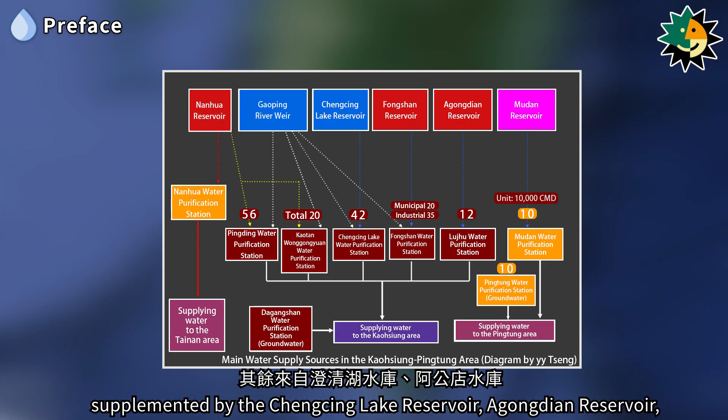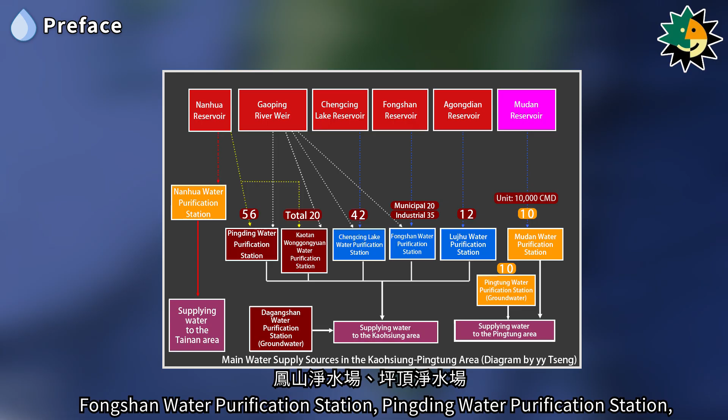The main water source for the Kaohsiung area comes from the Gaoping River weir, supplemented by the Chengcing Lake Reservoir, Agongdian Reservoir, Fongshan Reservoir, and Nanhua Reservoir in Tainan. These sources provide water to the Chengcing Lake Water Purification Station, Lujhu Water Purification Station, Fongshan Water Purification Station, Pingding Water Purification Station, Wonggongyuan Water Purification Station, and Kaotan Water Purification Station.

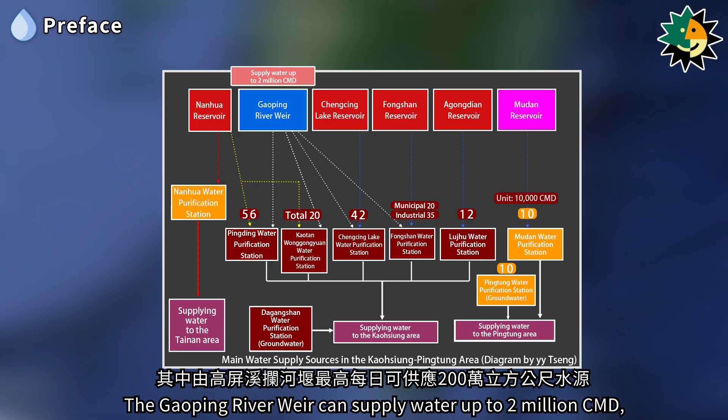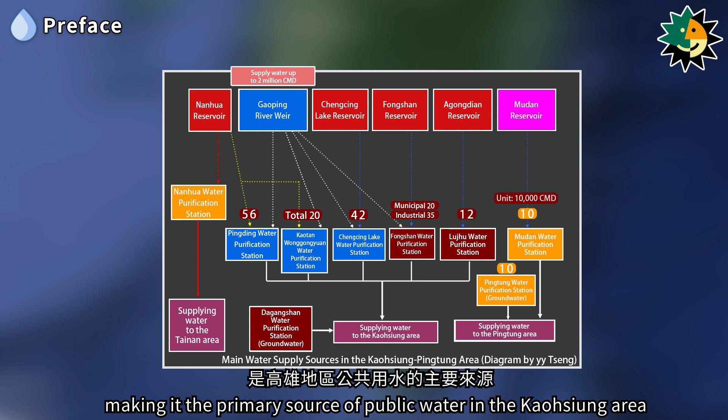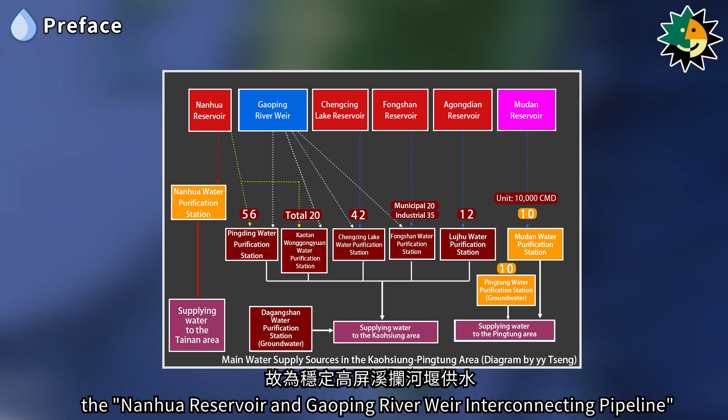The Gaoping River can supply water up to 2 million cubic meters per day, providing raw water to the Pingding, Wonggongyuan, Kaotan, and Chengcing Lake Purification Stations, making it the primary source of public water in the Kaohsiung area. Due to the significant difference in rainfall between the wet and dry seasons in southern Taiwan, the Nanhua Reservoir and Gaoping River Weir interconnecting pipeline was constructed in 2001 to stabilize water supply from the Gaoping River weir. It was completed in 2003, with a designed daily supply capacity of 800,000 cubic meters.

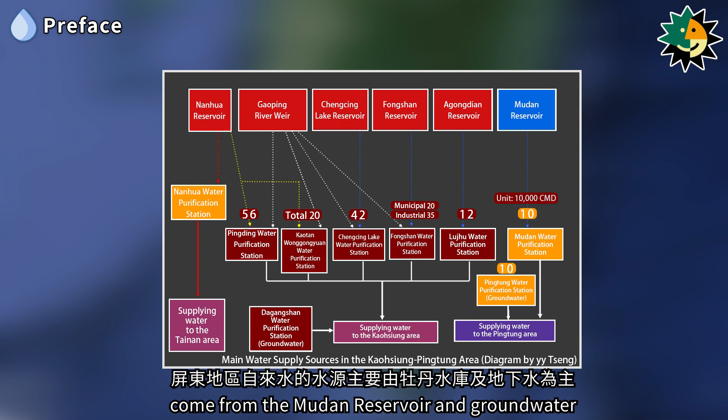The main water sources for the Pingtung area come from the Mudan Reservoir and groundwater. The Mudan Water Purification Station supplies water to the southern Pingtung area, while the Pingtung Water Purification Station supplies the northern part of the area.

The previous chapter introduced the Chengcing Lake Reservoir and Chengcing Lake Water Purification Station, Agongdian Reservoir and Lujhu Water Purification Station, Fongshan Reservoir, and Fongshan Water Purification Station. This chapter will continue by discussing the Gaoping River weir, Pingding Water Purification Station, Wonggongyuan Water Purification Station, Kaotan Water Purification Station, and the Mudan Reservoir, Mudan Water Purification Station, and Pingtung Water Purification Station in the Pingtung area.

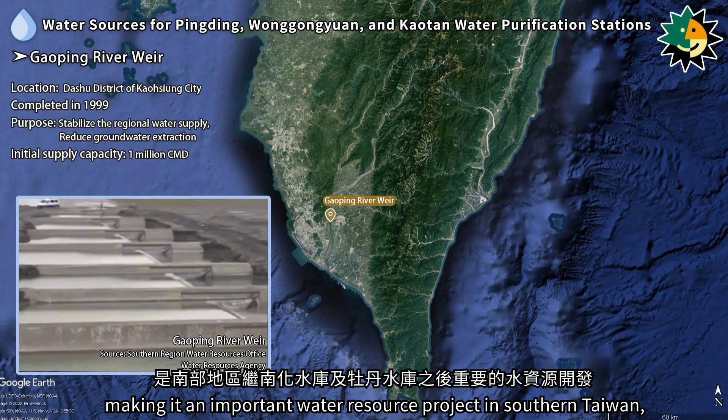The water sources for Pingding, Wonggongyuan, and Kaotan Water Purification Stations primarily come from the Gaoping River weir. Also known as the Dashu weir, it is located in Dashu district of Kaohsiung City, 2 kilometers upstream of the Gaoping Railway Bridge on the lower reaches of the Gaoping River. The Gaoping River weir was constructed to address the significant difference in rainfall between the wet and dry seasons in southern Taiwan. To stabilize the regional water supply, construction began in 1994 and was completed in 1999, making it an important water resource project in southern Taiwan, following the Nanhua and Mudan reservoirs.

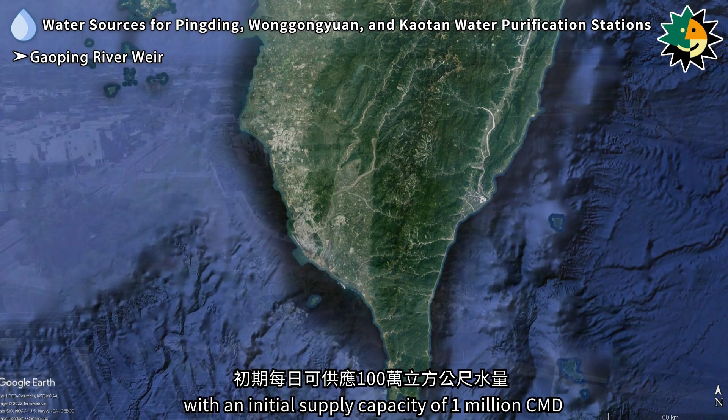The water intake point for the Gaoping River weir is upstream of the confluence of the Wuluo River and Gaoping River. The weir can supply water year-round, with an initial supply capacity of 1 million cubic meters per day and a maximum supply capacity of 2 million cubic meters per day, making it the primary source of public water supply in the Kaohsiung area. The functions of the weir include reducing groundwater extraction in the Kaohsiung-Pingtung area, mitigating land subsidence, and resolving local water rights disputes. Additionally, it is connected to the Nanhua Reservoir via an interconnecting pipeline, allowing for joint water supply, further stabilizing the provision of municipal and industrial water for the Kaohsiung area.

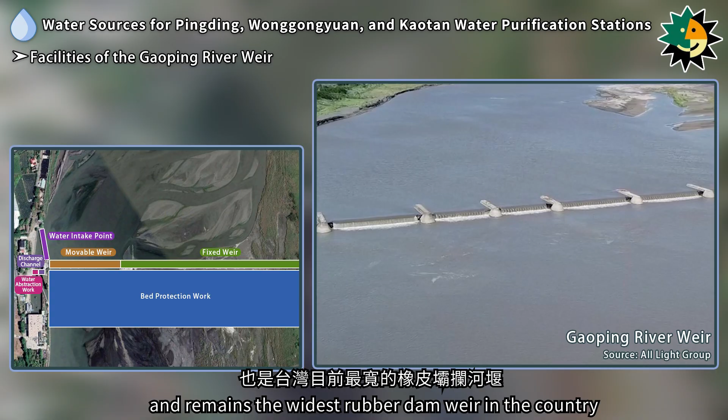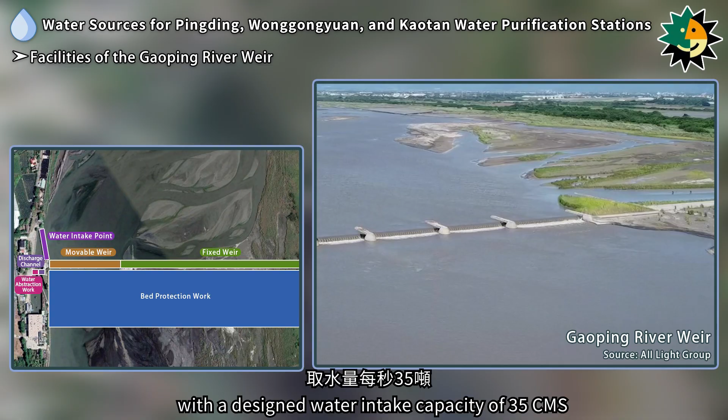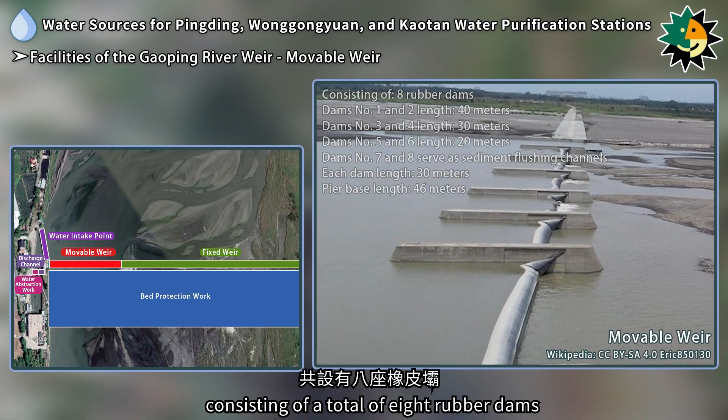The Gaoping River weir is Taiwan's first rubber dam weir and remains the widest rubber dam weir in the country. It is designed to raise the water level but has no water storage function. The intake level is set at an elevation of 16.4 meters, with a designed water intake capacity of 35 cubic meters per second. The weir structure is 960 meters long, divided into a 286-meter movable weir section and a 674-meter fixed weir section. The movable weir is equipped with inflatable rubber dams, consisting of a total of 8 rubber dams. The fixed weir is a concrete structure, 674 meters in length.

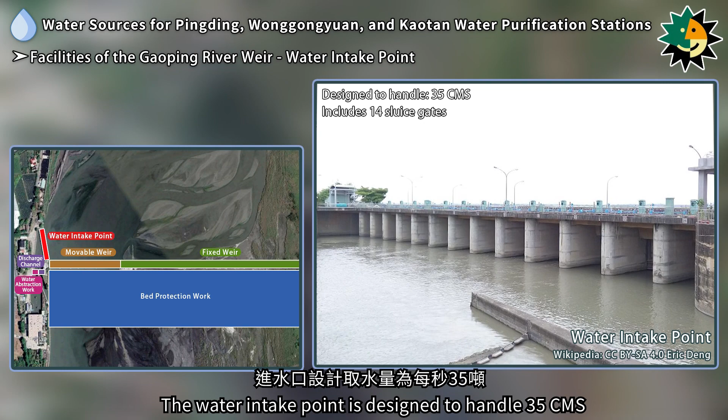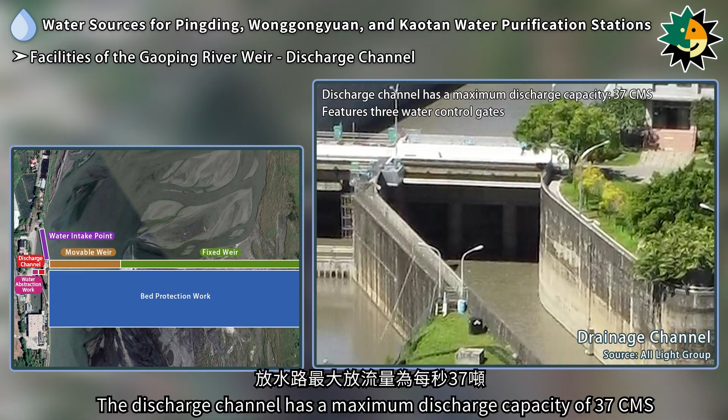There are 3 bed protection structures, each 45 meters wide, spaced 100 meters apart. The water intake point is designed to handle 35 cubic meters per second and includes 14 sluice gates. The water abstraction work is designed to handle 35 cubic meters per second and features 3 water control gates, followed by a grit chamber. The discharge channel has a maximum discharge capacity of 37 cubic meters per second and features 3 water control gates. It discharges turbid water back into the Gaoping River.

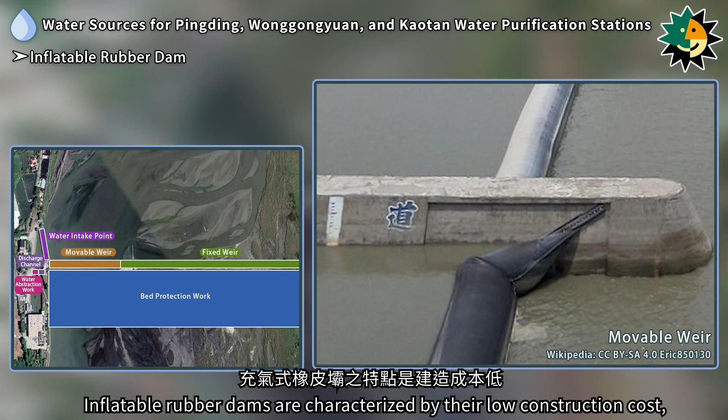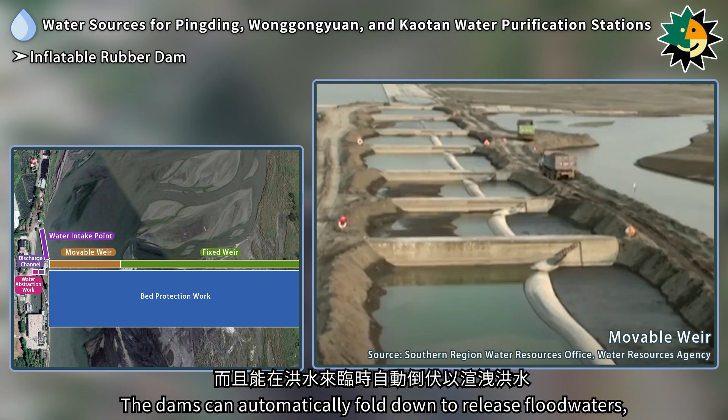Inflatable rubber dams are characterized by their low construction cost, ability to avoid blocking water, leak resistance, high seismic resilience, low foundation requirements, and short construction period. The dams can automatically fold down to release floodwaters, preventing upstream water levels from rising too high and causing flooding. However, they are more prone to damage and wear, resulting in a shorter lifespan compared to concrete weirs.

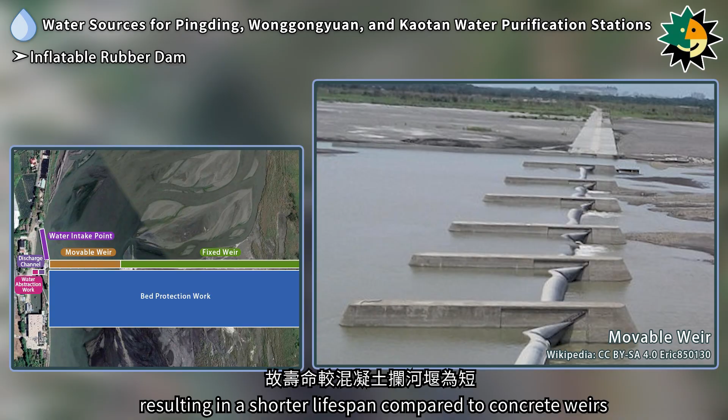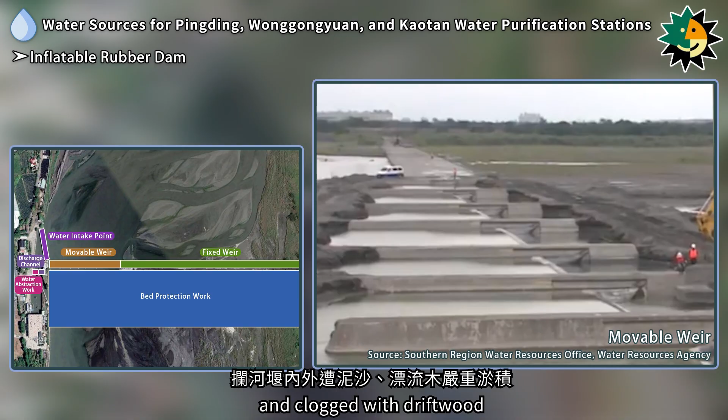In 2009, Typhoon Morakot brought torrential rains to the Gaoping River basin, submerging the Gaoping River weir. Both the interior and exterior of the weir were severely silted and clogged with driftwood. Among the 8 rubber dams, 3 were punctured by driftwood and were replaced in early 2010.

After the completion of the Nanhua Reservoir, in addition to supplying raw water to the Nanhua Water Purification Station, an interconnecting pipeline with the Gaoping River weir was constructed to stabilize its water supply. During the wet season, water is diverted from the Jiaxian weir to fill the Nanhua Reservoir. When the Gaoping River weir's supply is insufficient, water is transferred from the Nanhua Reservoir.

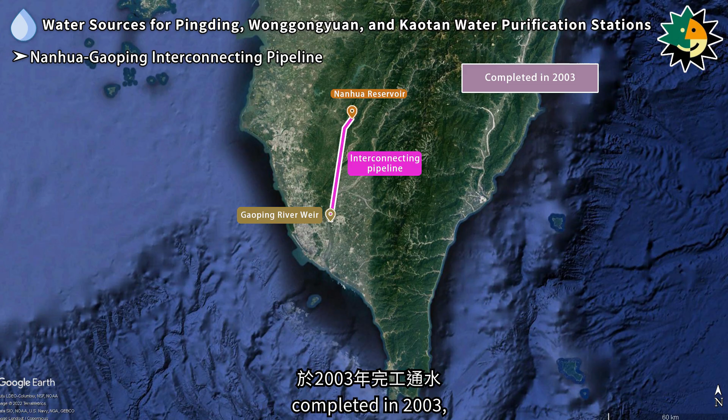The Nanhua-Gaoping interconnecting pipeline, completed in 2003, is 57.7 kilometers long, with a total supply capacity of 800,000 cubic meters per day. It was built to address water shortages during the Gaoping River's dry season. The pipeline operates entirely by gravity, making it an energy-efficient water resource facility. In 2006, additional lining was installed in parts of the pipeline, and 3 pressure-reducing stations were added along the route. These upgrades were completed in March 2007, significantly improving the region's capacity to respond to water shortages.

Pingding Water Purification Station, located in Dashu Township, was originally constructed in 1909. Its predecessor was a water purification station established during the Japanese colonial period in Xiaoping Village, serving as Kaohsiung's first headwater point. Initially, the station had a water output of 140,000 cubic meters per day. In 1999, the first phase of an expansion project was completed, increasing the designed output to 800,000 cubic meters per day.

The station has 2 main sources of raw water. The first is surface water drawn from the Gaoping River weir, with an average intake of 520,000 cubic meters per day, and the second is groundwater extracted from the Zhuliao Water Station, with an extraction volume of 30,000 cubic meters per day. Additionally, the Nanhua Reservoir serves as a backup water source. Currently, the Pingding Water Purification Station has a water output of 560,000 cubic meters per day, which can supply approximately 1.2 million residents.

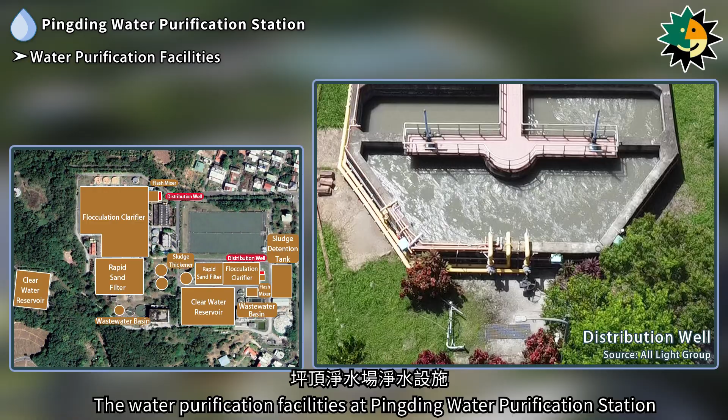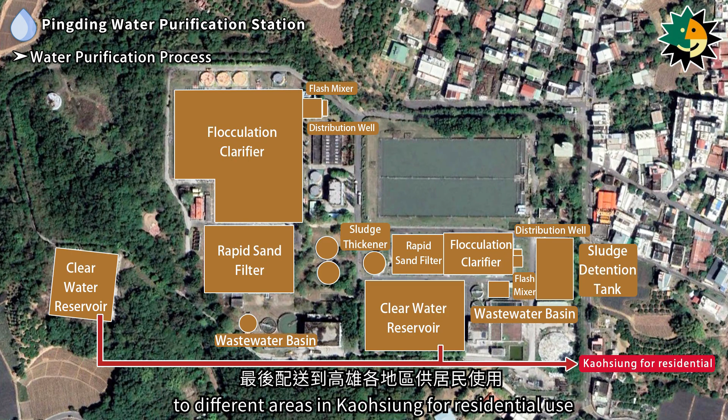The water purification facilities at Pingding Water Purification Station include a distribution well, flash mixer, flocculation clarifier, rapid sand filter, clear water reservoir, wastewater basin, sludge thickener, and sludge detention tank. The water purification process involves drawing raw water from the Gaoping River weir and the Zhuliao Water Station, which is then sent to the distribution well. The water is subsequently distributed to various flash mixers, passes through the flocculation clarifier, rapid sand filter, and chlorine disinfection system before being stored in the clear water reservoir. Finally, the purified water is distributed to different areas in Kaohsiung for residential use.

The main water supply areas for Pingding Water Purification Station include Nanzi District, Zuoying District, and Northern Kaohsiung, as well as Dashu, Renwu, Dashe, Gangshan, and Fongshan districts in Kaohsiung City.

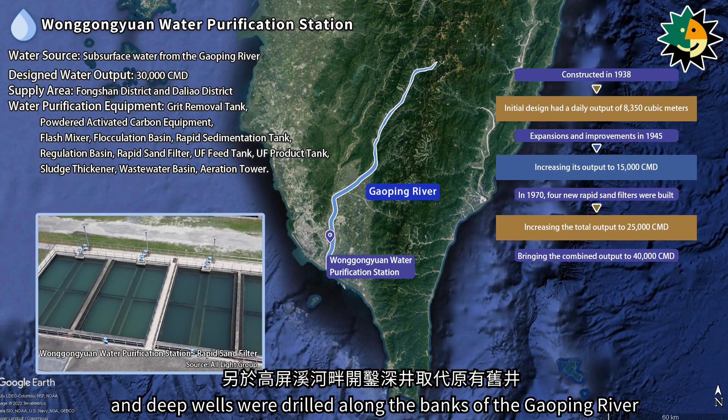Wonggongyuan Water Purification Station was constructed in 1938 and originally served as Kaohsiung's second headwater point. Its water supply involved drawing subsurface water from the Gaoping River and pumping it into shallow wells at the station. The initial design had a daily output of 8,350 cubic meters, sufficient to supply 50,000 residents. After being taken over by the Kaohsiung city government in 1945, the station underwent expansions and improvements, increasing its output to 15,000 cubic meters per day. In 1970, 4 new rapid sand filters were built, and deep wells were drilled along the banks of the Gaoping River to replace the old wells, increasing the total output to 25,000 cubic meters per day, bringing the combined output to 40,000 cubic meters per day.

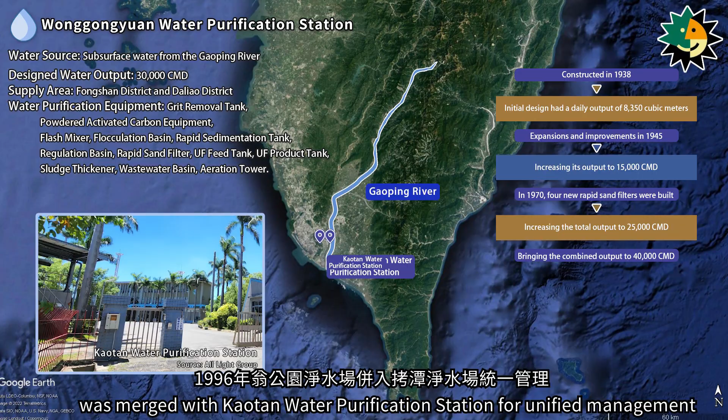In 1996, Wonggongyuan Water Purification Station was merged with Kaohsiung Water Purification Station for unified management. Due to aging wells and difficulty in finding new ones, the water source was switched to surface water from the Gaoping River weir, while groundwater became a supplementary source. Some of the raw water drawn was sent to Kaotan Water Purification Station for further treatment. In 2007, advanced water treatment equipment was added to improve drinking water quality, with an output of 30,000 cubic meters per day.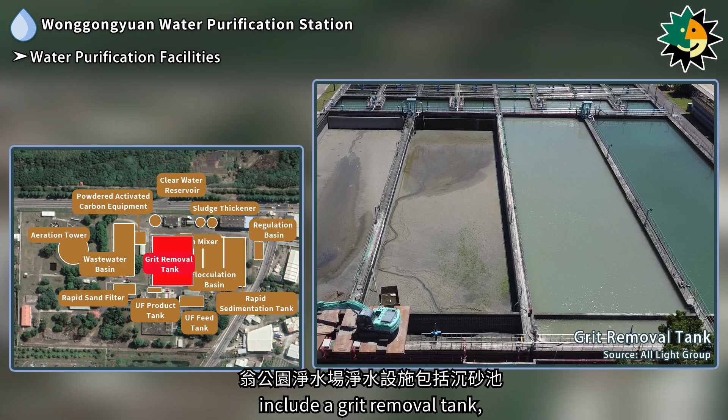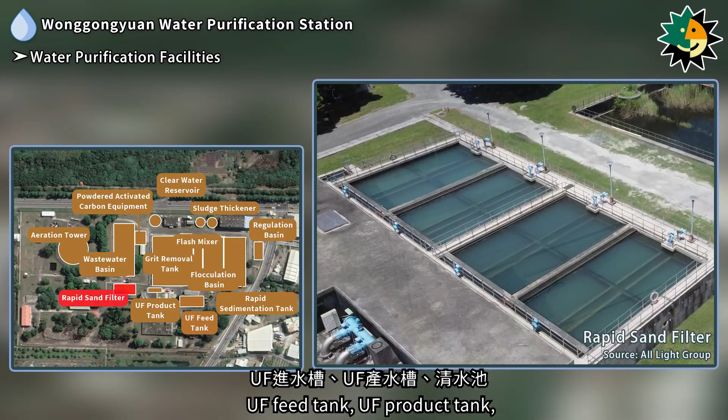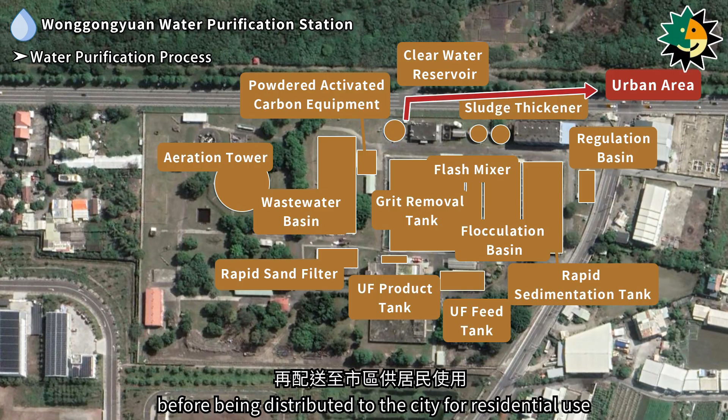The water purification facilities at Wonggongyuan Water Purification Station include a grit removal tank, powdered activated carbon equipment, flash mixer, flocculation basin, rapid sedimentation tank, regulation basin, rapid sand filter, UF feed tank, UF product tank, clear water reservoir, sludge thickener, wastewater basin, and aeration tower. The process starts by drawing raw water from the Kaoping River weir into the grit removal tank. The water is treated through a series of facilities, including the flash mixer, flocculation basin, rapid sedimentation tank, regulation basin, and rapid sand filter. It then passes through advanced purification units like UF and LPRO to improve water quality. The purified water is stored in the clear water reservoir before being distributed to the city for residential use. The main water supply areas include Fengshan District and Daliao District.

Kaotan Water Purification Station is located in Daliao Township and was constructed in 1972. The original water source was deep wells in the Daliao area. Initially under the jurisdiction of the Chengqing Lake Industrial Water Treatment Plant, the station had a designed output of 150,000 cubic meters per day, primarily supplying the Kaohsiung Linhai Industrial Park. In 1974, it was merged with the Water Corporation and redesignated as Kaohsiung Water Treatment Plant. In 1993, in line with the Water Corporation's policy of separating industrial and residential water supplies, additional facilities, including rapid sand filters, clear water reservoirs, and flocculation clarifiers, were constructed in 1995, increasing the output by 100,000 cubic meters per day, bringing the total designed output to 250,000 cubic meters per day.

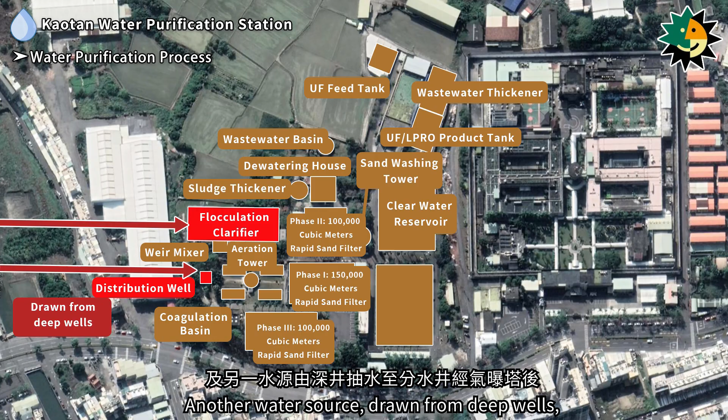The water purification process at Kaotan Water Purification Station involves receiving raw water from Wonggongyuan Water Purification Station. The raw water is first treated in a flocculation clarifier. Another water source, drawn from deep wells, is processed in a distribution well and aeration tower before entering the coagulation basin and rapid sand filters.

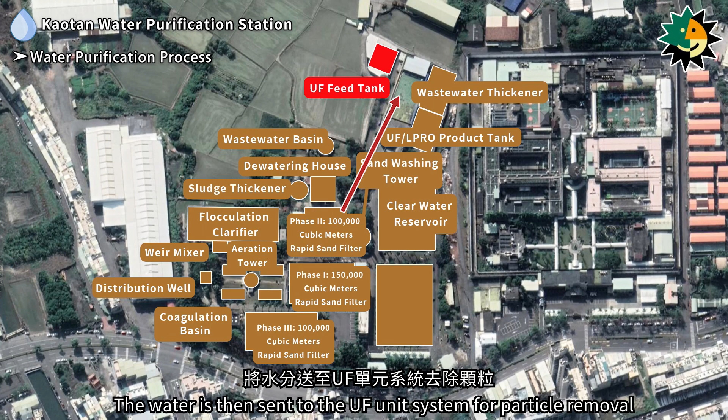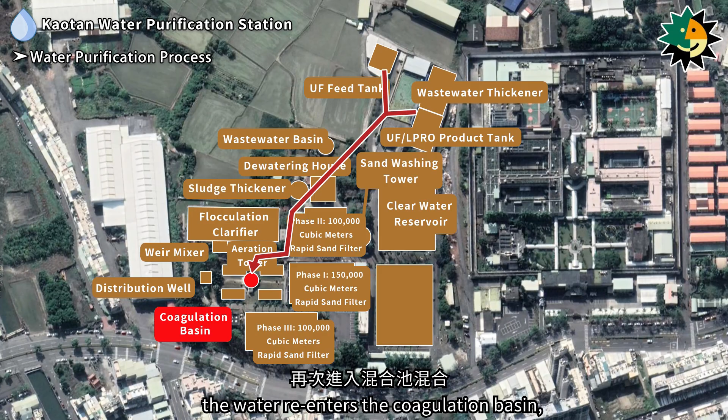The water is then sent to the UF unit system for particle removal and the LPRO system for ammonia-nitrogen removal. After filtration through both systems, the water re-enters the coagulation basin, and the treated water is stored in the clear water reservoir before being distributed to urban areas for residential use. The main supply areas for Kaotan Water Purification Station include Xiaogang, Cijin, Qianzhen, Linyuan, Daliao, and Fengshan districts in Kaohsiung City.

Mudan Reservoir serves as the primary water source for Mudan Water Purification Station. It is located in the valley of Sichong River in Mudan Township, southern Pingtung County, and was completed at the end of 1995. Mudan Reservoir collects water from the upstream tributaries of Mudan River and Rureng River, primarily supplying the area from Donggang to the Hengchun Peninsula. The reservoir has a capacity of 39.4 million cubic meters and irrigates an area of 500 hectares, supplying raw water to Mudan Water Purification Station with 100,000 cubic meters per day.

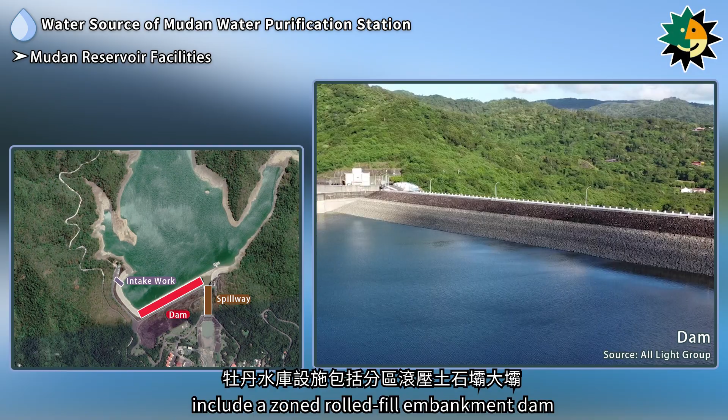The facilities at Mudan Reservoir include a zoned rolled fill embankment dam. The spillway is a gated controlled overflow work connected to a discharge chute, while the intake works consist of an inclined multi-level intake tower located on the right bank of the dam, which connects to a water tunnel. The grandeur of the Mudan Reservoir spillway gates is impressive. Walking along the top of the dam offers sweeping views of Shimen Village. From a distance, the entire reservoir reflects white clouds and green mountains on its calm waters, creating a stunning landscape.

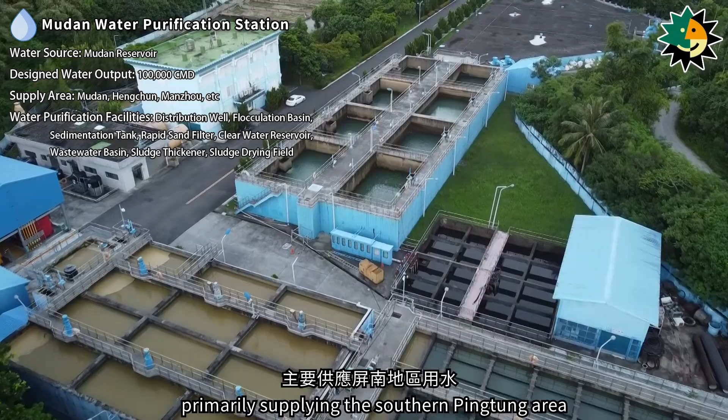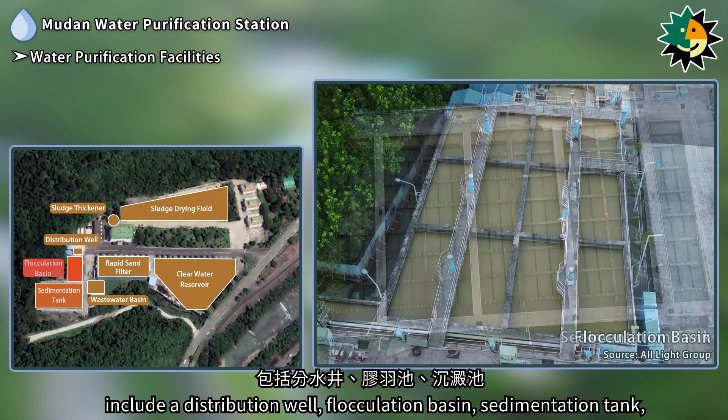Mudan Water Purification Station is located in Mudan Township, Pingtung County, and sources its water from Mudan Reservoir. It has a designed output of 100,000 cubic meters per day, primarily supplying the southern Pingtung area. The water purification facilities at Mudan Water Purification Station include a distribution well, flocculation basin, sedimentation tank, rapid sand filter, clear water reservoir, wastewater basin, sludge thickener, and sludge drying field.

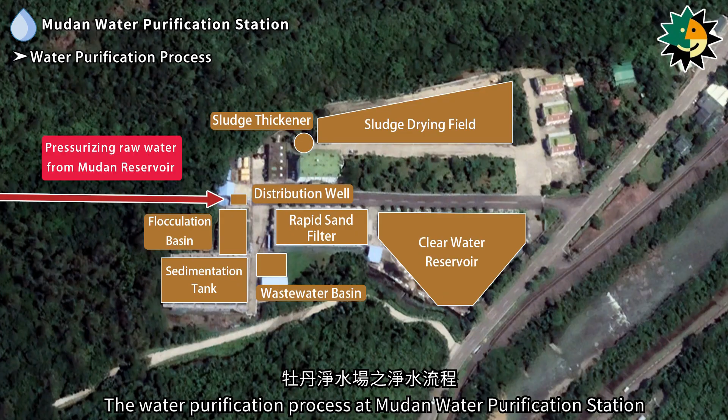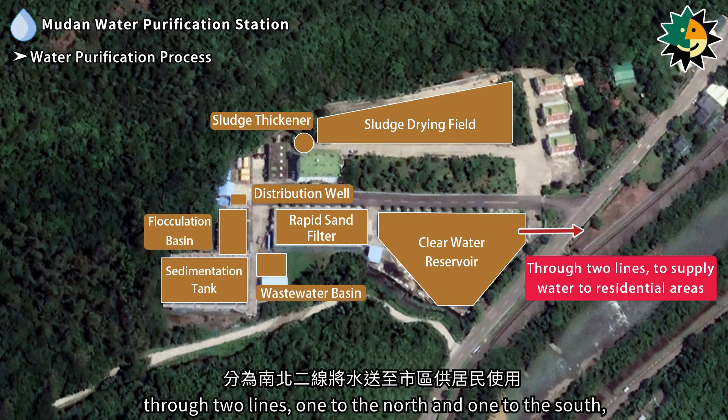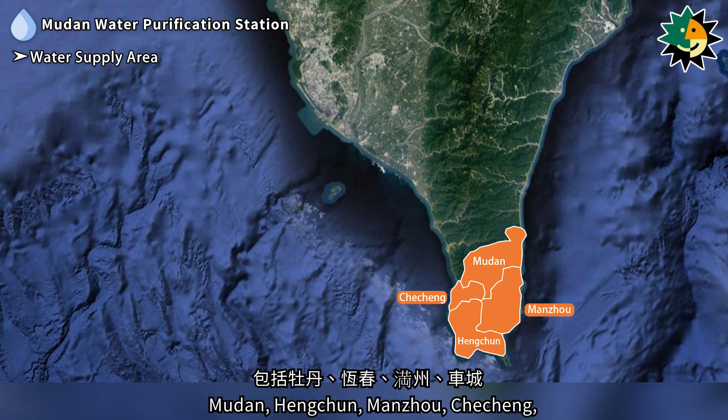The water purification process at Mudan Water Purification Station involves pressurizing raw water from Mudan Reservoir and sending it to the distribution well. After undergoing flocculation, sedimentation, and rapid filtration, the water is sent to the clear water reservoir. It is then distributed by gravity through two lines, one to the north and one to the south, to supply water to residential areas. The water supply area of Mudan Water Purification Station includes 17 townships: Mudan, Hengchun, Manzhou, Checheng, Fenggang, Fangshan, Shizi, Chunri, Fangliao, Xinpi, Kanding, Nanzhou, Jiadong, Linbian, Donggang, Xinyuan, and Liuqiu. The pipeline network extends over 149 kilometers.

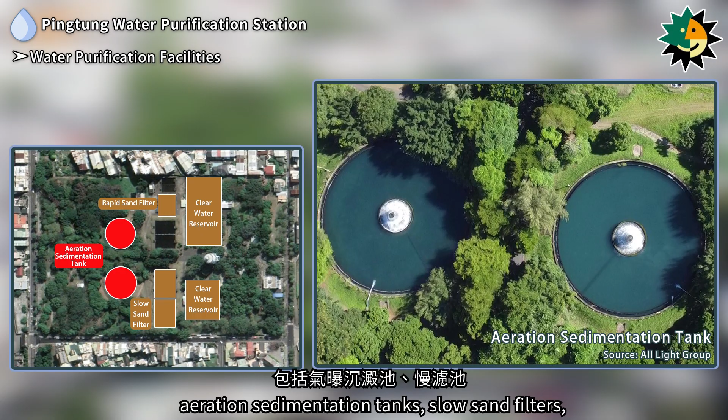The predecessor of the Pingtung Water Purification Station was the Agu Waterworks, built during the Japanese colonial period. Water supply began in 1916, and as Pingtung City's population grew, the original waterworks could no longer meet the demand. In 1934, a new water source was developed in Changxing, and the facility was expanded in 1938. Due to the abundance of groundwater in Pingtung City, the main water source for the Pingtung Water Purification Station comes from deep wells, with an output of approximately 65,000 cubic meters per day, supplying water to around 63,000 residents in Pingtung City. The water purification facilities at Pingtung Water Purification Station include aeration sedimentation tanks, slow sand filters, rapid sand filters, and a clear water reservoir.

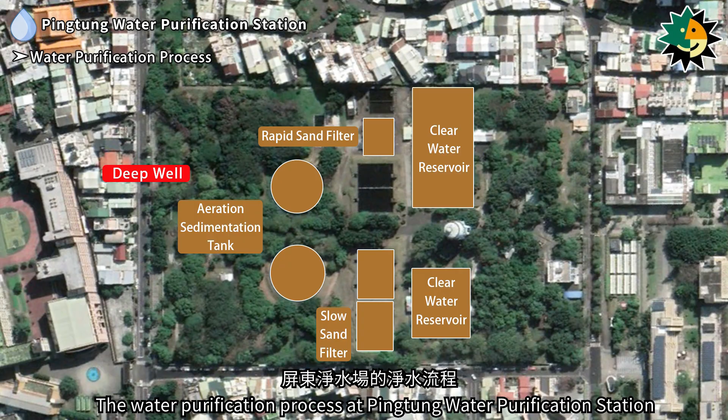The water purification process at Pingtung Water Purification Station involves extracting raw water from deep wells within the facility and sending it to the aeration sedimentation tank. The water then undergoes sedimentation, slow filtration, and rapid filtration before being stored in the clear water reservoir and distributed to the city for residential use. The main water supply areas for Pingtung Water Purification Station include Pingtung City, Changzhi Township, and Wandan Township.

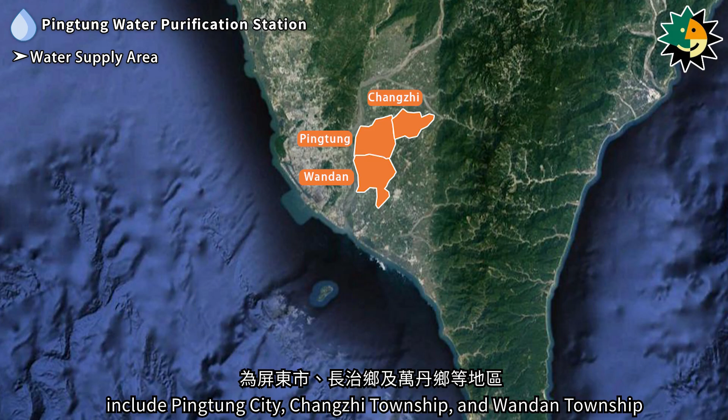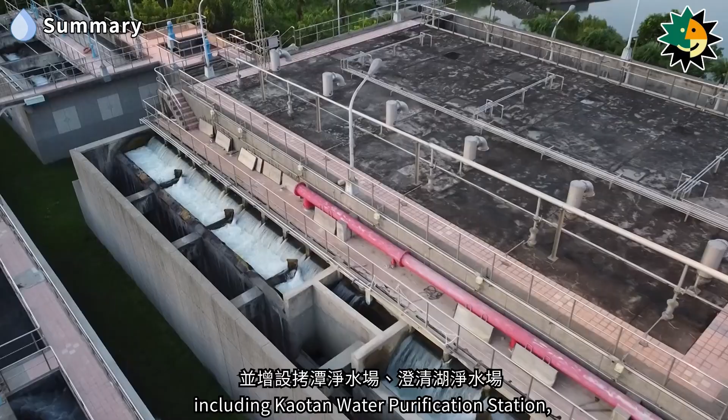In terms of water sources, several reservoirs were successively built, including Chengching Lake Reservoir, Agongdian Reservoir, Fengshan Reservoir, Mudan Reservoir, Gaoping River Weir, and the Nanhua Reservoir interconnecting pipeline, to ensure a more stable and adequate water supply. The waterworks in the Kaohsiung-Pingtung area have spanned over a century, contributing to the industrial growth and economic prosperity of the area. As we enjoy the conveniences of modern life, let us not forget to appreciate the long-standing efforts and dedication of the public water supply personnel.